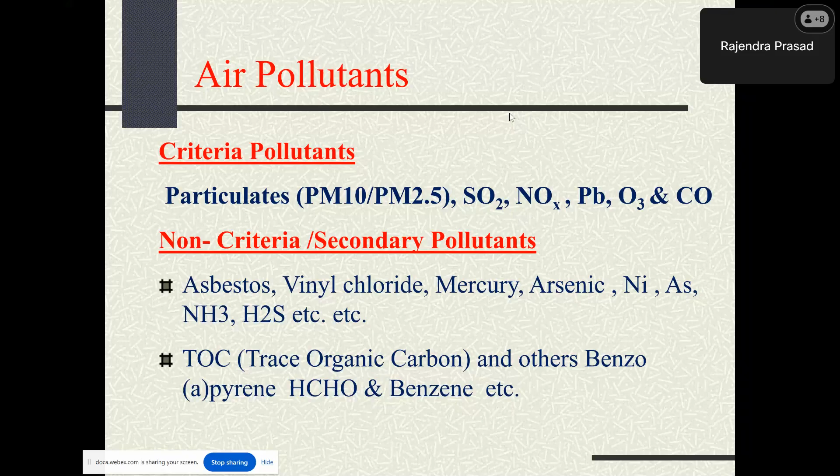So you have got an idea that there are particulate and gases, there are criteria pollutant and non-criteria pollutant or secondary pollutant.

Now the objective today of the presentation is to really give you an exposure on how to do air pollution management and control. Of course, I will come on this at the last part. First, I want to show you the challenges for slightly more exposure and understanding of where we are at this stage. That part we will cover in the last part of the presentation.

Then this air pollution management or control is the reduction of this pollutant. You have to understand that pollutant emission should be reduced to a point such that there is no noticeable adverse effect associated with the pollutant.

To determine the extent of reduction, understand and establish the linkage between source and receptor using meteorology. At some point it is emitted, and receptors are spread all around the atmosphere. Meteorology includes wind speed, wind direction, temperature, humidity, mixing height, stability, wet barometric pressure, and rainfall. All these parameters are part of the meteorology. They affect the emitted pollutant and impact the receptor.

So we have to understand these linkages between receptor and emitter, and establish a safe air quality level for the receptor - what is called the standard. If we say that the standard is 50 microgram per meter cube of say PM 2.5, then we say that at that level it is not going to impact our various receptors, including sensitive targets, significantly. So we can tolerate up to 50 microgram per meter cube, and this standard is not arbitrarily chosen.

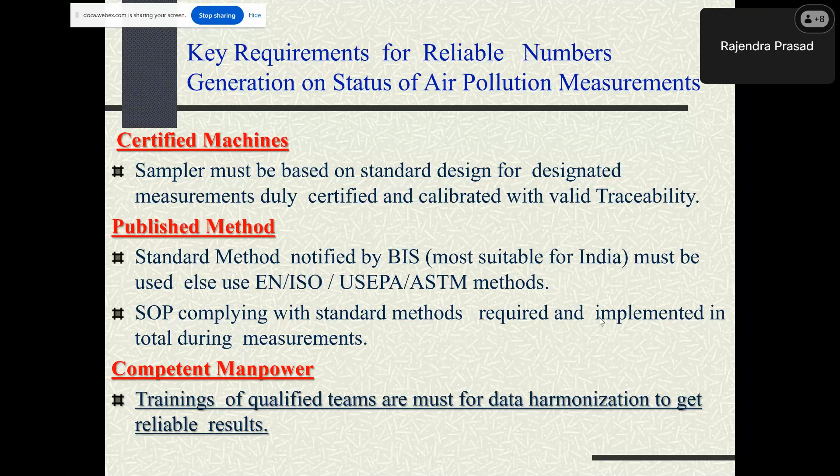Competency should be that for what we are hiring, or for what we are putting that person on the job, he should be able to give a number which should be reliable, and it should have all that flavor for which that person is involved, and he should have that qualification, learning, and he should do that experiment with that. So I made clear that these three things are very important.

Now you see what is happening in our country. Government of India has invested enormous financial resources and scientific manpower to create a formidable infrastructure in India for air quality monitoring, to know the quality of air regularly.

All these things which I'm mentioning here are based on my own exposure and understanding. So they are not taken from anywhere else - I'm giving you my own experiences. At some point you may feel that I may not be 100% right, but these are my experiences. So please take them in that spirit and see what possibility we can do to improve upon.

We know that monitoring is key and the first step towards management and control of air. Therefore, it is the responsibility of the lab monitoring groups to work honestly, ethically, and passionately in mission mode to generate reliable numbers for credibility.

I want to once again read this - that the people who are working in the laboratory or in the groups, they should work honestly, ethically, and passionately in mission mode, because our objective is to really do the measurement as correct as possible. That number is what we use to plan so many things - we'll say whether it is polluted or not, if polluted how much, if action needs to be taken, what action, which action is appropriate. All these things are built on that.

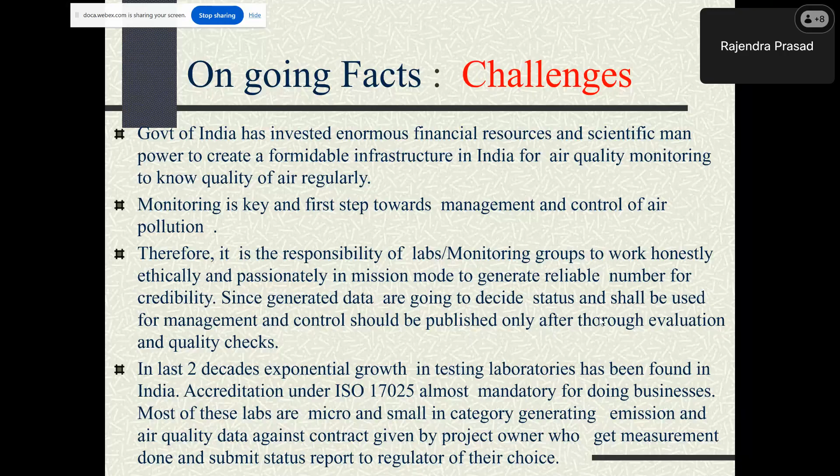You have to make the payment for their services. If you will not make the payment to that service provider, will you be able to get the report or results manipulated or impacted, and then the true things will not come? So this is one major challenge which is observed and which is taking place in the country.

Now you see the growing inter-laboratory business competition. There are now a large number of labs set up. Among the private labs created, mesh...

Basically what has happened is that several, I think 7-8,000 testing labs are there, and out of this around 1,000 or more than 1,000 environmental monitoring labs are existing in the country. ISO 17025 protocols are compromised because there's a lot of interlaboratory business competition and they are bypassed. Manpower competence is not continually improving. This is a basic need, that every time the competency of the staff and the laboratory has to be increased, but it is not improving.

Whatever I saw, I did several hundred lab assessments, and this is my finding, that this aspect is getting compromised. The teams are not participating in competence-enhancing training programs or conferences, so their exposure is not really increasing, and they are not able to really achieve the objective of ISO 17025 the way it is desired and the way it is implemented.

SOPs are also compromised. A number of you are making SOPs from the method. Some of the things which you are not having, you are basically neglecting, you are dropping, and ultimately what will happen? It is going to impact the value. And if the value is impacted, then all your efforts are basically going to waste. Poor quality consumables are used in the face of the lower price of the monitoring being offered, because for the competition you have to keep on giving less price.

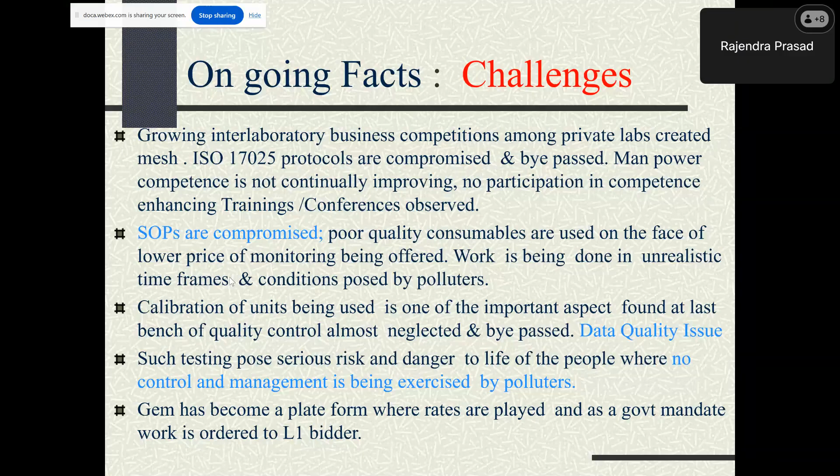The values of the critical parameters they are monitoring have significant errors and leakages. And the problem then is, whatever value they are reporting, there is no confidence in the value. Such testing poses serious risk and danger to the life of people, where no control and management is being exercised by the polluters. GEM has also become a platform where rates are played, and as a government mandate, work is ordered to the L1 bidder. Because of interlaboratory business competition, people keep giving lower prices, and once the order is received, to cope with that business, they compromise a number of aspects. Now let us go deeper into the experience I gathered in the past.

Accurate and reliable measurement of air pollutants is a challenge due to the wide range of pollutant concentrations. Besides the GEM business and other issues, now let us go to the subject. In our country there are areas where the concentrations are 20, 30 micrograms per meter cube of PM10, PM2.5, but there are areas where these concentrations are 500, 600, 800, 900 micrograms per meter cube. This means our system should be such that we can have the lowest value measurement and the higher concentration measurement.

And we do not have a system saying for the low range you can use this, for the high range you can use this. Our regulation is not really talking of anything on this. They say this instrument, this notification, this method, but what kind of accuracies and errors that method has, that is creating a serious challenge. Then there are harsh and variable climatic conditions, somewhere very low temperatures, somewhere very high temperatures. Recently I was talking to Ladakh, they are having -25, -30. The same regulation is also applicable there.

Whether these machines will work there, whether these methods which have been prepared are going to be applicable correctly, whether they will be able to measure these pollutants or not. These issues are there when the barometric pressure becomes 600 in the hilly area, in the Manali area, many areas where these measurements are being done. Those values are not going to be produced confidently if those provisions are not incorporated in this.

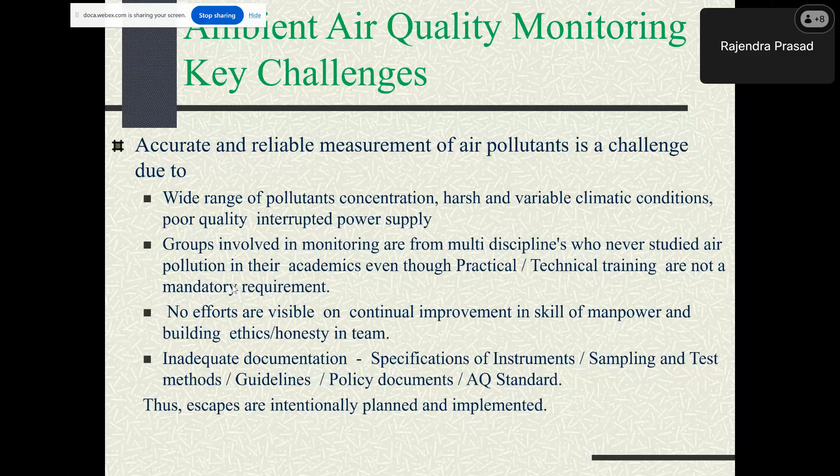Now let us come to some more aspects: quality control and quality assurance, or uncertainty assessment. These concepts or tools are not in regular practice and never made a part of the reporting. If you are reporting some result, don't you feel that you should also analyze a known sample and say that in my known sample analysis we got 2% or 5% variation, so we are ensuring that we have checked quality control and quality assurance? For quality control, you should have better gadgets, better manpower, a better system at your place. Uncertainty assessment is not done, and many times not understood either.

Whenever you are reporting a number, this is not an absolute number, you have to say what possibility of error is there, and the error may be because of instrumental error, analytical equipment error, climatology or environmental conditions error, or error of the person doing the work in taking readings. Uncertainty assessment is already well defined: the type A and type B components need to be taken, and then one can find it out. If you are reporting 100, there may be 10% or 5% uncertainty, whatever it is.

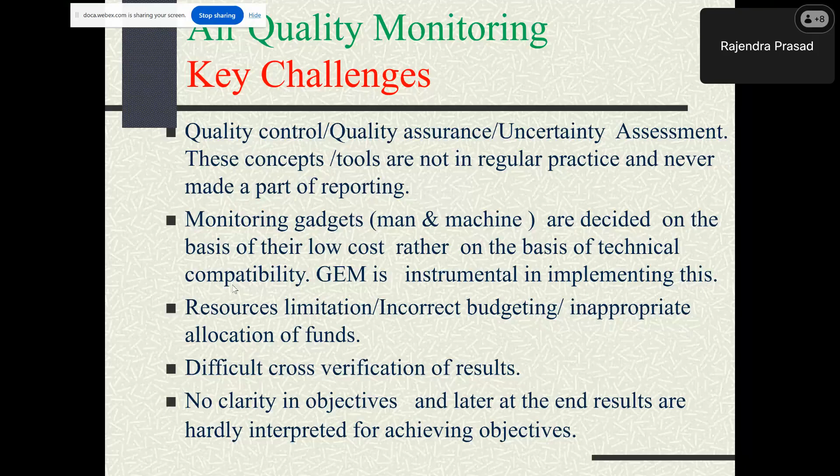Now if we concentrate on the infrastructure part: inadequate sampling and analysis instrumentation, erratic power supply, already said. Standby equipment is not considered. We are not planning. We feel that having two instruments is enough, but sometimes an instrument may go out of order or may not give the desired values. Then you can use a standby while you fix it. So this should also be part of the management.

Spare parts and consumables for maintenance and operation of the instruments are not procured. Intermediate checking systems are not considered. We assume that once calibration is done, the entire year it will remain stable, even when taking it from one place to another without maintaining the requirements suggested by the manufacturer. That is really over-expectation.

From time to time it should be checked whether all parameter values are coming correctly. And ISO 17025 very clearly asks that these instruments be checked more frequently, monthly, bi-monthly, quarterly, if you are using them in the field, to see whether the calibration or values given by the machines remain reliable. Annual calibration of all instruments used is not done as per requirement. Only one set of instruments is calibrated.

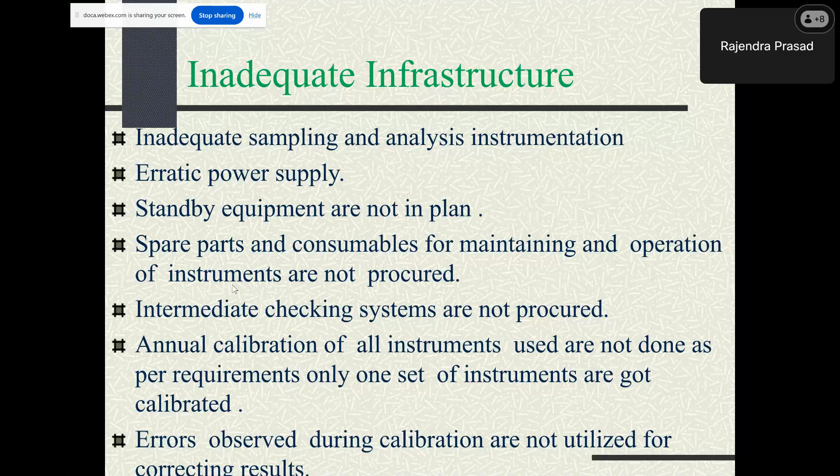A very interesting aspect is that errors observed during calibration are not utilized for correcting results. This part pains everyone, and me very badly. You get an instrument calibrated, you get 1.5% error, 1% error, 2% error. What are you doing with that error or deviation? You are not incorporating it. You keep those certificates only to show the auditors. Calibration is not done for the auditor, it is done for improving the results.

Now, towards the management level, what sort of things? Monitorings are not given adequate priority. Appropriate fund allocation for the instruments and the consumables is not done. Findings reviews are not done for any action on the results, because from a number of online monitoring stations and offline monitoring stations, results are coming. Management is hardly bothered.

They feel that we have complied, and all the time they want the record to be made like this, that everything is all right, pollution levels are well within the standard, so nothing needs to be done. And even if it is beyond that, they will not report that; if emissions are beyond that, they will keep on reporting everything is all right.

If everything is all right, then how are these problems in our country seen everywhere? The levels are more, and the health problems are there, many things are there. So management has to look into these things.

Provision of inadequate manpower, because if you have good capability and do good work, you will be shifted to production, you will be shifted to another area, sales. But for the environment, you are putting those people who are not very productive, and you say that we will put you into that field and you do work there.

So this is the attitude of organizations, management level, or the industry, where you basically find that the people who are managing these environmental monitorings are those teams which are less exposed and less professional in that area.

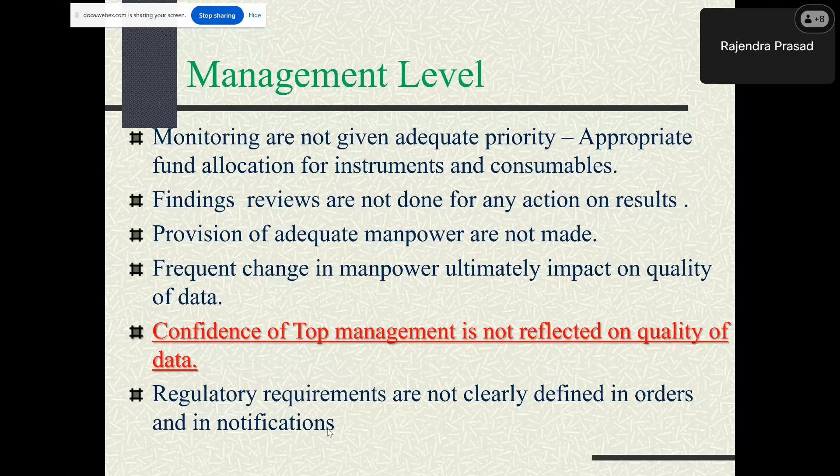Specifications of instruments are not even defined. NPL has been decided as the certification body very recently, only 3 or 4 years back, and air pollution is as old as the Act of 1981. So how much time we took to certify an organization or body that will do the evaluation and certify the instruments, but its infrastructure is yet to be established and start work, and manpower is not there.

Some instruments they have procured and the work is going on, something they have started, but still a lot more needs to be done. Instruments do not meet key requirements mentioned in the standard sampling method. Tolerances, accuracy, precision, permissible uncertainty parameter-wise are not defined, not implemented.

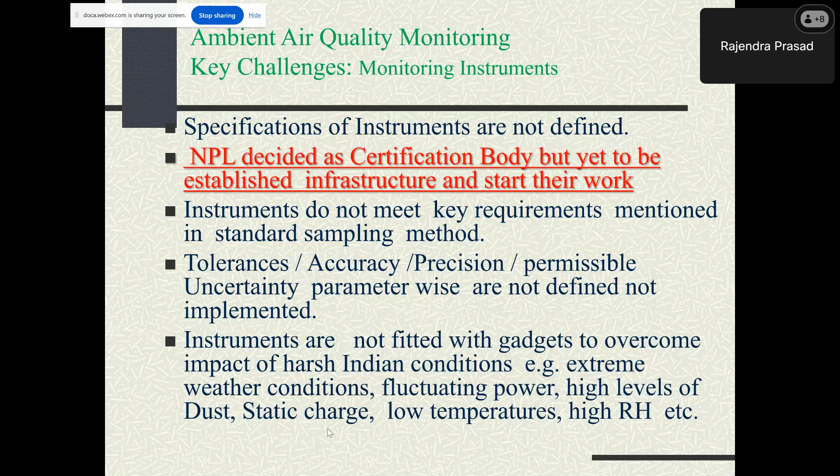Instruments are not fitted with gadgets to overcome the impact of harsh Indian conditions: extreme weather, fluctuating power, high levels of dust, static charge, low temperature, high humidity. These also require attention. If these things are not looked at from that detailed point of view, the people using these instruments may not be able to generate data confidently.

Calibration and intermediate checking of the instruments are not available for the full range with known uncertainty. Masters used for calibration must have valid traceability. If available, these are not used to check samplers and analyzers on a regular basis. For dust sampling, a proper omnidirectional, wind-insensitive inlet is needed with certified fractionating impactors. Devices are found compromised because of cost cutting.

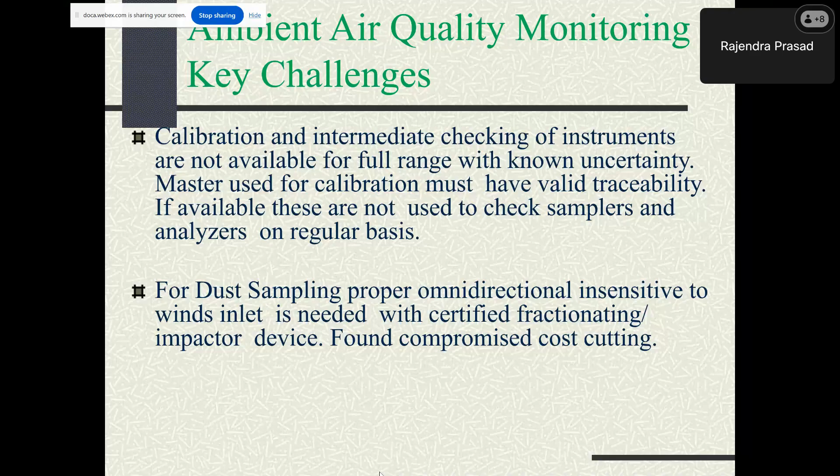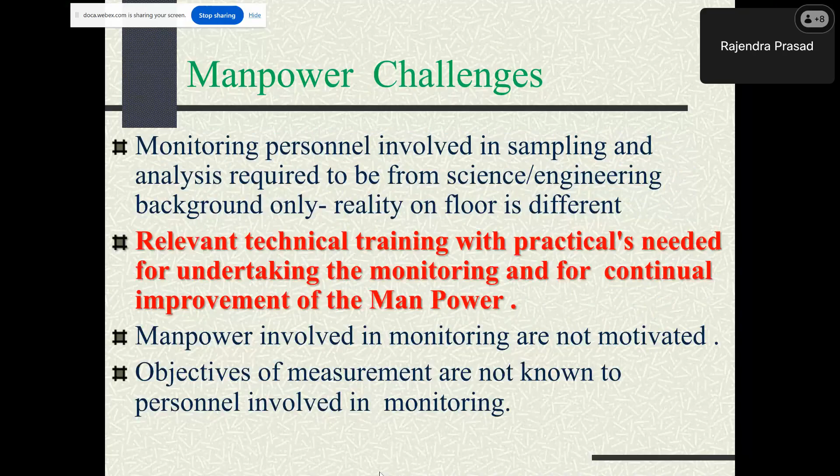Manpower challenge I've already highlighted, and there's no point highlighting them once again. This is very important. We should be able to see that the people have regular training and competence building. Now, practices, what is required. The laboratory where analysis of collected samples is done should have accreditation. It is a mandatory requirement. So one should have it, and accreditation should be in true spirit.

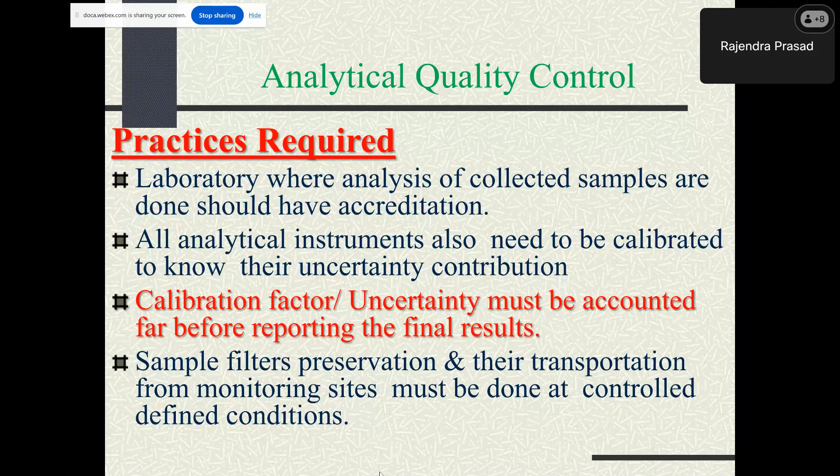All analytical instruments also need to be calibrated to know their uncertainty contribution. Calibration factor and uncertainty must be accounted for before reporting the final results. Sample filter preservation and their transportation from the monitoring site must be done at controlled, defined conditions. You should have a setup and you should be able to implement that.

Filters should be used for sampling only after their weight stabilization and conditioning. In these filters, because a lot of air gaps are there, the moist air goes there, then the water molecules remain there, and ultimately the initial weight should be taken only after conditioning. A balance of relevant accuracy is required for specific use. Filter desiccation and weighing must be done in a temperature and RH controlled room.

Sensitivity and resolution of the analytical system must be carefully evaluated. Field blanks are used to know the handling error. You see that the filter handling and conditioning system has significant bearing on the monitored dust concentration. In our country, dust is a major pollutant, and other gases and other pollutants are also there. They are also important, but dust is taking the foremost seat.

And you see that we are still using the high volume respirable dust sampler for PM10 measurement. There we are using an 8 by 10 inch filter sheet. And how to weigh this big size of filter paper? There is not even a balance available which can weigh this. And you see, we are folding it, putting it in a beaker, and then finding out its weight. A lot of challenges there.

Size of the desiccator and the saturation of the desiccant result in incomplete conditioning. That part requires attention. Desiccators are not equipped to display prevailing temperature and RH in the chamber where filters are kept.

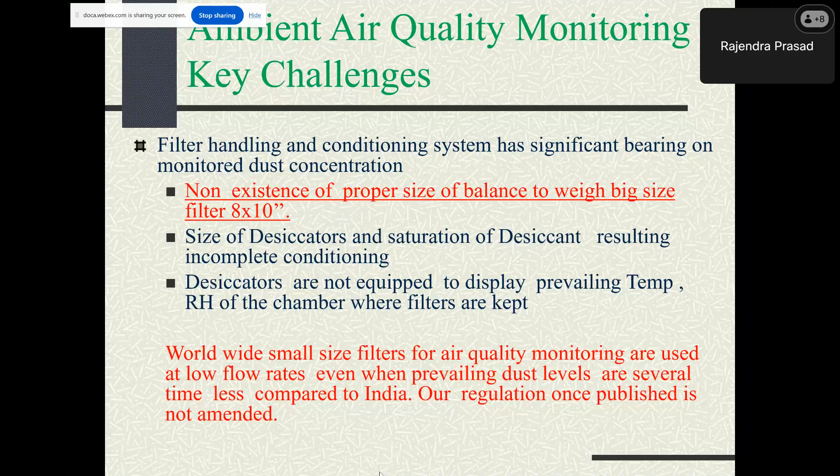Inadequate documentation in the method and the standard. They are saying 24 hours. I say, which 24 hours? I do not know. Midnight to midnight, morning 6 to 6, 10 to 10. People are reporting values of different 24 hours, so they are not comparable.

Ultimately, in Ahmedabad someone is measuring some value, in Delhi someone else is. We do not know which 24 hours he has operated the machine and which 24 hours the Delhi people have operated. So we need this kind of clarity. I'm putting my effort into these kinds of things with the help of BIS, but still every area needs to be given attention, and ultimately find out what the possibilities are.

Consecutive and non-consecutive days are mentioned in the standard. Thereby it is clear, but it is not clearly defined. What happens? You say non-consecutive days, 2 consecutive days, 104 samples. If you see that, then you will not be able to really check the data which you have generated for a year long. The gap is there.

Sampling flow rate for the various air pollutants is not clearly defined. For example, PM10 is done at 1 cubic meter per minute in RDS, and also at 1 cubic meter per hour in the PM2.5 sampler for PM10. Results obtained at these flow rates have significant differences in uncertainty. Thus, PM10 data being generated at two flows may not remain comparable.

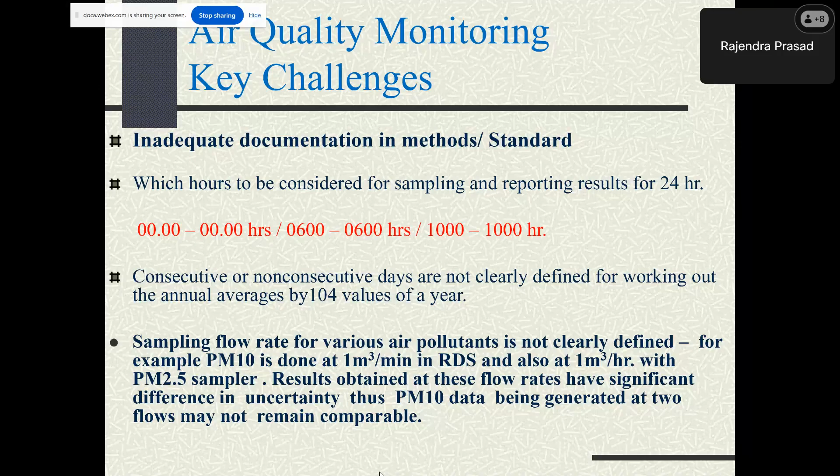But someone is doing it with 1 cubic meter per hour, someone is doing it with 1 cubic meter per minute. So these are the incomplete documentation; procedure, calibration frequency, and accuracy requirement of the master are not specified in the method. According to the ambient air quality standard, 12 pollutants need to be monitored to define quality of air.

Some measure all parameters for 104 days as asked in the standard in a year. Some measure only a few parameters, the criteria pollutants, whether they have these 104 days, and remaining whenever they have time and resources.

The new standard came in November 2009. Still, clarity is not documented on which parameter to be monitored, when and where. If you are telling a 24-hour sample, whether exactly 24 hours is run, then only will you consider it a valid sample, or 10 minutes less or 10 minutes more. So validity of the sample says 75% of the time it has run, then we will say okay, it is a valid sample.

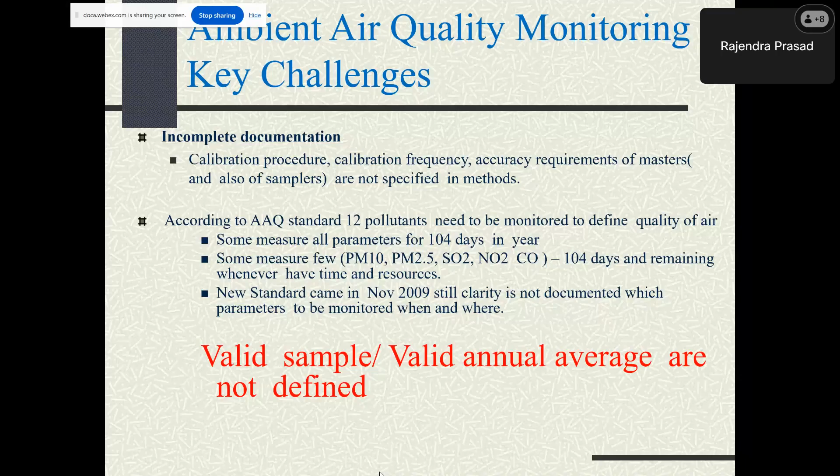Now I'm going to make a case presentation, just to show you that these kinds of things are required. I have a lot of hope things can improve. I've highlighted only those gaps which were there. Of course there are a lot more strengths available, but let me show you two or three more slides about what documentation is basically required.

Multiple instruments with filters are needed to collect 24-hour samples to know day-to-day variation in dust level. If you want to monitor PM10 and PM2.5 at one location, you need two samplers. And if you want to do benzene and CO, you should have two more samplers. The gases you can attach with the respirable dust sampler. So multiple instruments need to be operated.

In winters, on foggy days, one PTFE filter for PM2.5 sampling chokes within 6 to 8 hours because the levels are very high. Since it's difficult to predict choking time, it's a kind of challenge to do 24-hour measurement. PM10 sampling using RDS is more difficult and unreliable even when multiple filters for a 24-hour sample are used - three filters one can use 8-hourly.

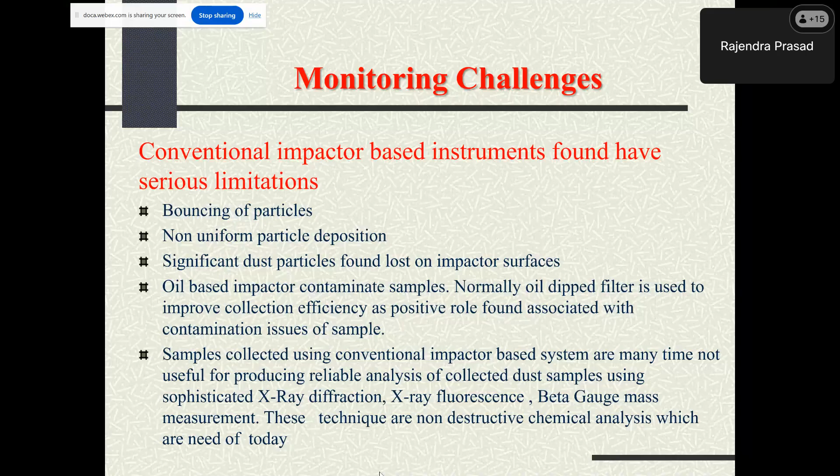The same method is being used where concentrations are many times more than 200, more than 300, 400. I feel these values which are being reported using the same technology are very difficult to say whether they are correct or not. Then the other one, the virtual impactor, is used for higher concentrations. It is well documented in the USEPA methods.

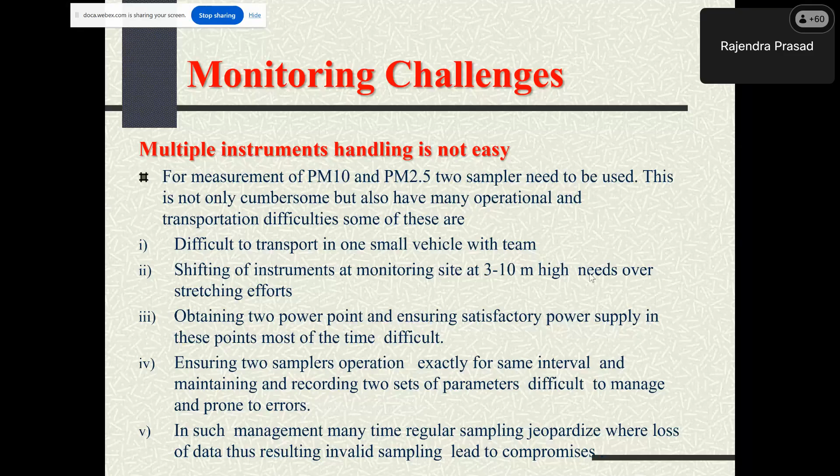For measurement of PM10 and PM2.5, samplers need to be used. This is not only cumbersome but also has many operational and transportation difficulties. Some of these are difficult to transport. Shifting of instrument and monitoring site at 3 to 10 meter high needs overstretching effort. Obtaining two power points and ensuring satisfactory power supply at these points is most of the time difficult. Ensuring two samplers operate exactly for the same time interval, and maintaining and recording two sets of parameters, is difficult to manage and known to have a lot of error. Many times the sample becomes invalid. In such management, many times regular sampling gets jeopardized, where loss of data resulting from invalid sampling leads to compromises.

This is the recent sampler which we have evaluated and developed. We have developed this since my completion of PhD. We have done a large number of instruments which are used across the entire country. They are all indigenous equipment, with the earlier company, and then with our separated company.

In the brand of Ecotech, you see that the brown filter is showing PM10, and this is showing less than 2.5, so this is showing 2.5 to 10 micron. By color also one can see that both filters are connected here, and air is entering. So one instrument is good for doing both PM10 and PM2.5 measurement. Gujarat Pollution Control Board at Gandhinagar has procured some 15, 16 units from us. They are operating and monitoring very easily. So this is the latest development.

It basically complies with the USEPA method, but of course CPCB has not yet notified this. They are still remaining with that WINS impactor, where the upper concentration limits are there. You cannot monitor more than 200 microgram per meter cube.

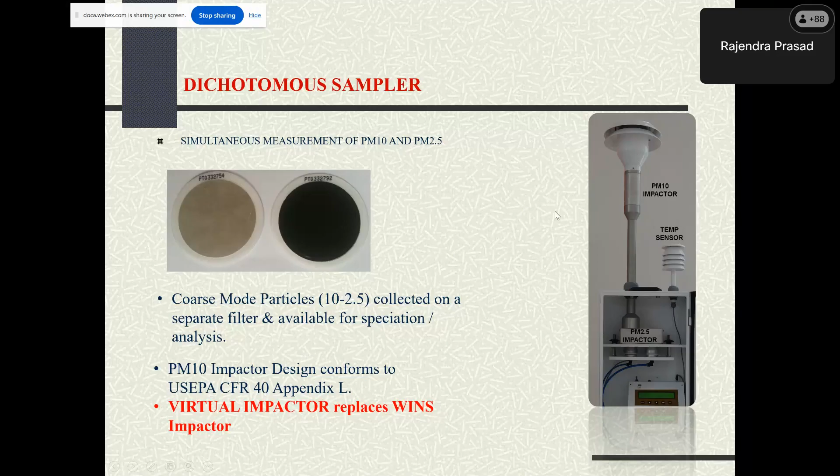Now I want to read this PPT which shows what kind of details are required when documenting the method. This is only for exposure, not to read everything in detail, but only to give you a feel. Let me read the principle.

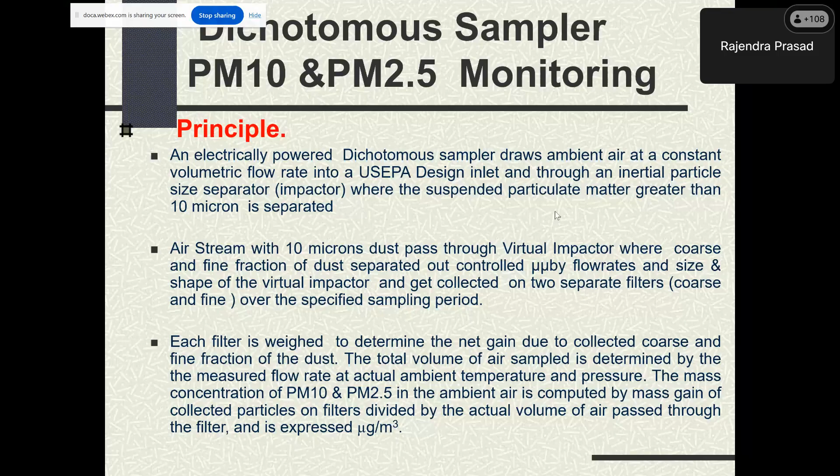An electrically powered dichotomous sampler draws ambient air at a constant volumetric flow rate into a USEPA design inlet and through an inertial particle size impactor, where more than 10 micron dust is separated out. Now the air stream with less than 10 micron dust passes through a virtual impactor, where coarse and fine fractions of the dust are separated out, controlled by flow rate and size and shape of the virtual impactor, and get collected on two separate filters, coarse and fine, over the specified sampling period. Each filter is weighed to determine net gain due to collected coarse and fine fraction of the dust. Total volume of air sampled is determined by the measured flow rate at actual ambient temperature and pressure. The mass concentration of PM10 and PM2.5 in the ambient air is computed by the mass gain on the filter divided by the actual volume of air passed.

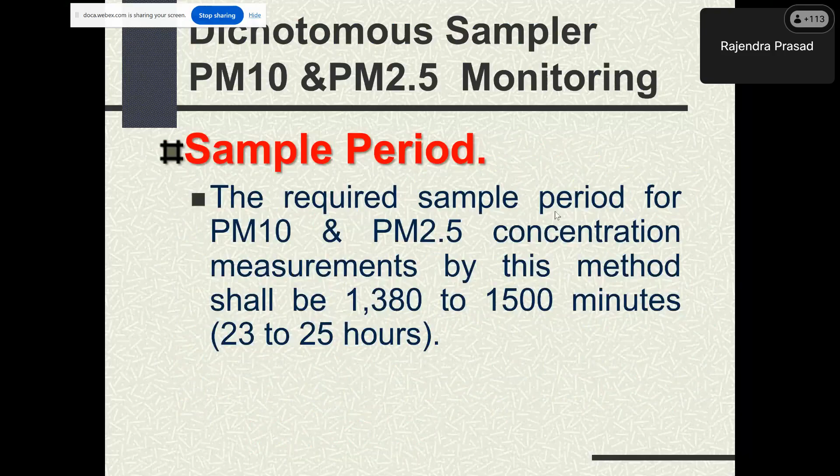Required sample, it can be operated for 24 hours without any issue. It has a very heavy duty pump, but it is not very heavy because the flow is low, that is the medium flow of 1 meter cube per hour. This is a recent development in the last 3 years or so.

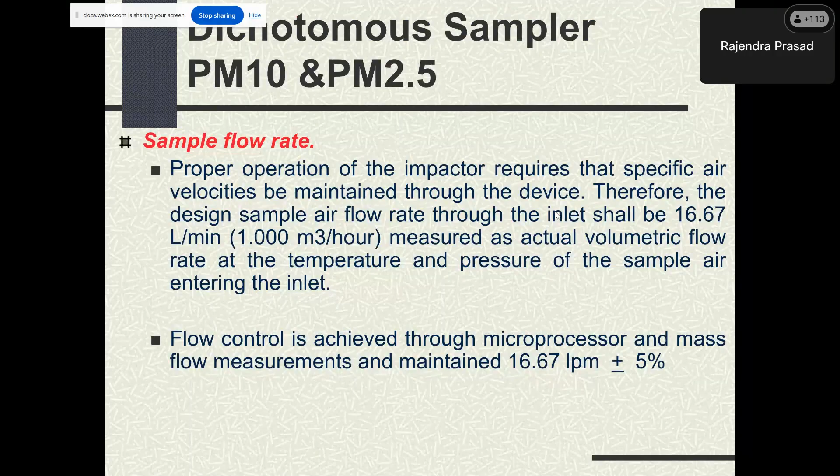Sampling flow rate is maintained at 16.67 liter per minute. Flow control is achieved through the microprocessor and mass flow measurement, maintained at 16.67 lpm plus minus 5%. Flow rate cutoff: the sample air flow rate control shall terminate sample collection and stop all sample flow for the remainder of the sampling period. If the sample flow rate deviates by more than 10%, it is automatically switched off. This is mentioned in their documents, and the sampler is designed to meet these requirements, and someone has to certify whether these requirements are completely fulfilled.

At this stage, whatever the manufacturer is doing, he is doing for his own satisfaction and then starts selling, because certification bodies are not there. But now if these things are coming, I think it will become a lot of improvement in the process, and the quality of the data will come using these kind of certified samplers.

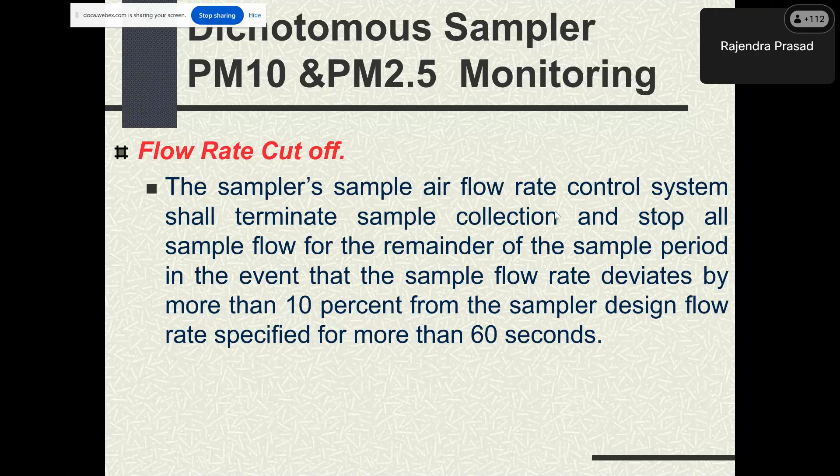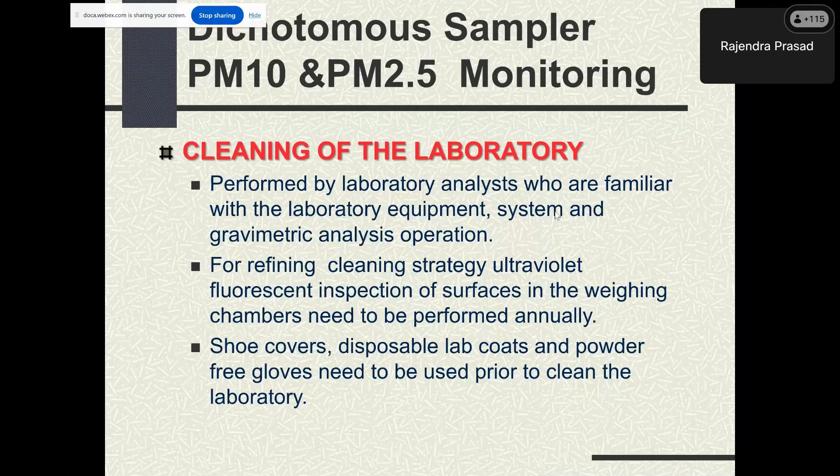Cleaning of the lab is performed by laboratory analysts who are familiar with the laboratory equipment system and gravimetric analysis operation. For refining cleaning strategy, ultraviolet fluorescent inspection of the surfaces in the weighing chamber needs to be performed annually. These are written into their documentation. Shoe covers, disposable lab coats, and powder-free gloves need to be used prior to cleaning the laboratory.

They have mentioned what kind of personal requirements are needed. Laboratory personnel will always wear clean clothes and wash thoroughly all parts of their body that may be exposed during the weighing, because you are doing PM 2.5, very fine dust, and particles on your body and clothes can contribute during the weighing.

Laboratory coats and gloves are required to minimize the potential for laboratory contamination, so these should not be moved out of the weighing room. That kind of precaution is required.

Must be aware of the potential for unacceptable relative humidity excursion during seasonal extremes such as high heat and humidity in summer. So humidity control, temperature and humidity controlled chambers are required, or small rooms are required.

Personnel employed to perform weighing operation must have at least a high school diploma with at least 6 months experience in laboratory sample handling and record keeping practices. These are very clearly mentioned in their standard method.

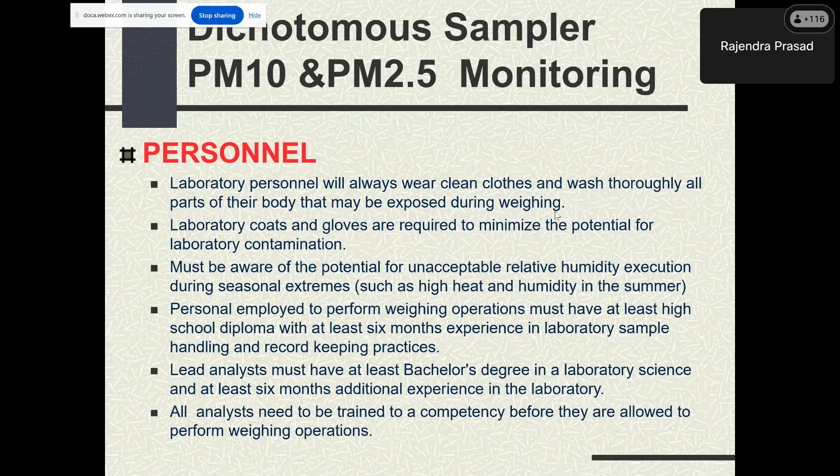The lead analyst, who manages the laboratory, should have at least a bachelor's degree in laboratory science and at least 6 months additional experience in the laboratory. All analysts need to be trained to competency before they are allowed to perform weighing operations.

Sampler location: a dichotomous sampler must have unobstructed airflow for a minimum of 3 meters from all directions. If samples are collected with multiple particulate matter samplers, the spacing between sampler inlets must be at least 1 meter from co-located samplers.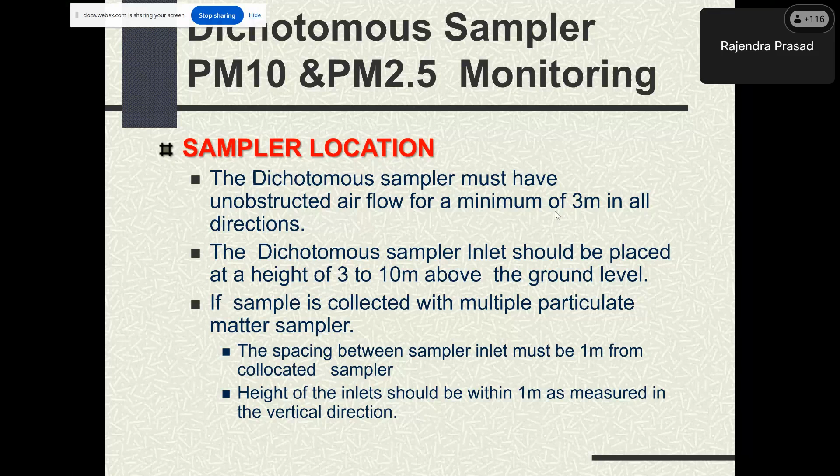Height of the inlet should be within 1 meter as measured in the vertical direction. If you keep it on the rooftop, your inlet should be at least 1 meter away from the rooftop, so that winds don't increase dust levels near the sampler and impact the concentration of dust being measured.

Now the analytical microbalance, which is required for weighing, must be adequate to weigh the filter between 100 to 400 milligrams, and must have sufficient room to weigh the type and size of the filter. The microbalance must have a minimum readability of 1 microgram for PM 2.5.

Of course, in our country, the pollution levels are very high, so even a 10 microgram accuracy balance can be utilized. But these things should definitely be outlined in the method. In BIS, when we wrote this method, we incorporated some of these things based on our own experience and based on documentation of other methods.

Repeatability should be 1 microgram. The balance must be calibrated at installation and checked immediately before each weighing.

Electrostatic charge buildup may need to be neutralized in the microbalance weighing chamber. What happens? We are using these PTFE, these Teflon filters. While sampling, static charge is developed. That charge needs to be removed. Otherwise, you are getting an incorrect weight because the charge value increases. So you are bound to report the wrong value then.

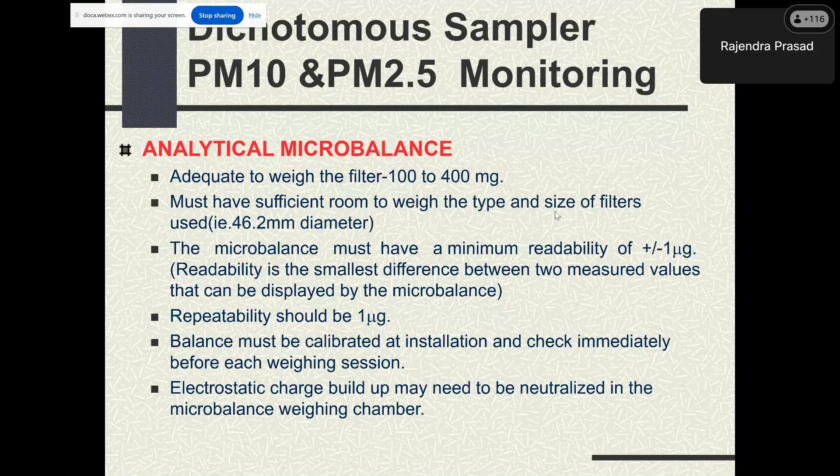Correct filter should also be used. You see that in our monitoring, what happens to compromise the cost? We are using non-standard filter paper only to save the cost. Their pore size, their collection efficiencies are less. Then ultimately, some part of the dust passes through the filter paper, and ultimately we end up with the lower concentration.

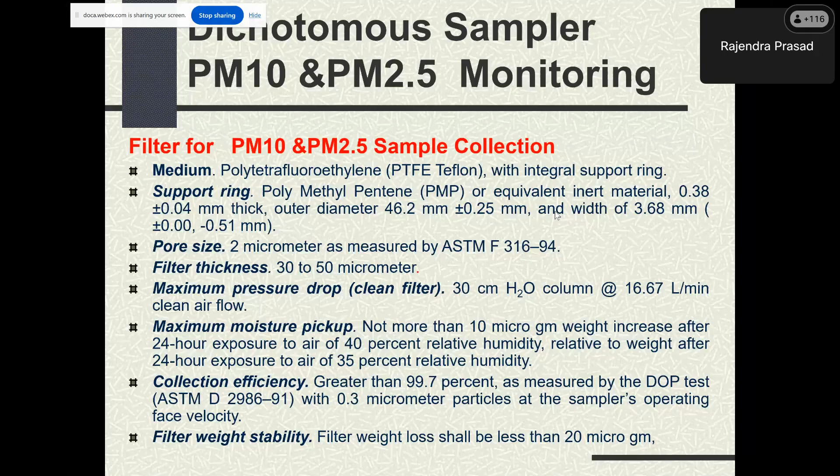This filter is called polytetrafluoroethylene filter. It has an integral support ring. Their size, pore size, thickness 30 to 50 micrometer. Pressure drop 30 centimeter water column at 16.7 liter per minute. Maximum moisture pickup, collection efficiency, and filter weight stability. 20 microgram is required. Many times you are weighing, it should not vary more than 20 microgram from one measurement to another measurement. Test for the loose surface particle contaminant.

They have very clearly said that you have to do testing of the filter. After initial weighing, install each test filter in turn in a filter cassette. Drop the cassette from a height of 25 centimeter to a flat hard surface, such as a particle-free wood bench. Repeat 2 times for a total of 3 drop tests for each test filter. Remove the test filter from the cassette and reweigh that filter.

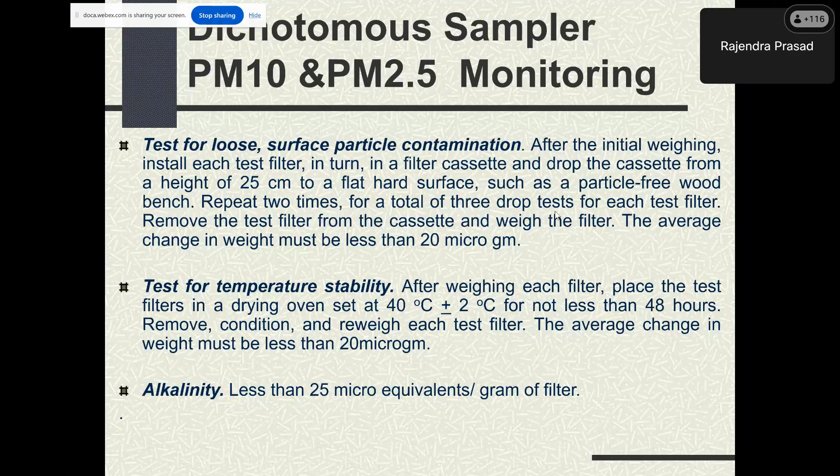The average change in the weight must be less than 20 microgram always, so that any loose particles added on the filter surface, which you are not able to see by naked eye, can be removed, and it can be passed that yes, we are handling our filter rightly. Test for the temperature stability, alkalinity, these are all defined in the method. What I want to show is that in our method, whatever we are preparing, we want that this kind of clarity should be developed or incorporated.

Weighing laboratory should have air conditioning, and including weekends, temperature and humidity should be maintained all the time. Locate the microbalance away from potential sources of drift, such as doors, windows, aisles with frequent traffic, ventilation ducts, and equipment with fans or moving parts. Locate the microbalance out of direct sunlight and away from local heating or cooling sources, such as open flames, hot plates, water baths, or the AC air.

Locate the microbalance on a sturdy vibration-free base, ideally a stone bench table, which should not touch the wall. Ensure the microbalance's base is of adequate height, so that working should not have problems. So these are some details I've shared with you, but there are some more things I want to share that will give you more interest. This has given more insight into the gaps and shown you some areas where more information is needed, so that reliable data generation can be visible in our country.

These are the kinds of instruments which are used for air pollution monitoring. You see all the instruments, I have only given you a photo here. In the back you can see the automatic weather station, which gives the temperature, humidity. It is solar powered, it has the wind speed and wind direction, and then barometric pressure, rainfall equipment, everything can be connected. Hourly values or 30-minute, 15-minute values can be done.

This is called the respirable dust sampler. Then this is the PM 2.5 sampler, these two. Then this is the combo sampler. Of course, dichotomous is not here. This is a recent development. The black one is the emission monitoring equipment. These are the work zone monitoring setup, noise monitoring system. This is the carbon monoxide monitoring system. These are the gaseous pollutant measuring equipment.

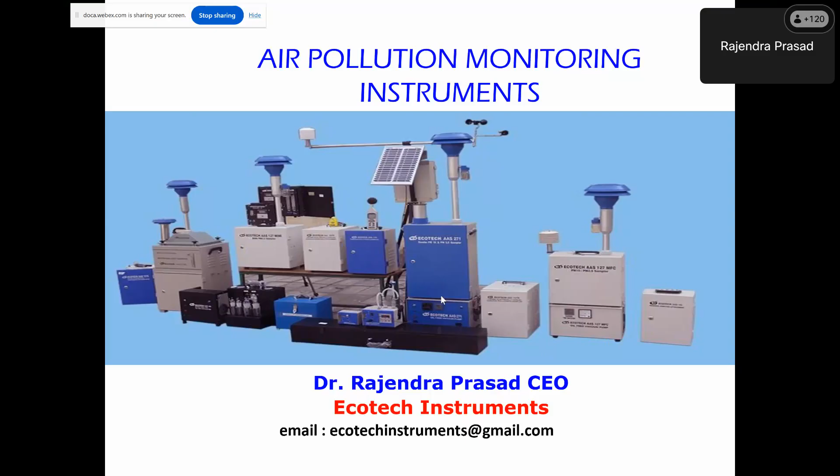So these are the range of equipment used for manual monitoring. They are considered the primary standard. They are not online monitors. Here it is the online monitoring system.

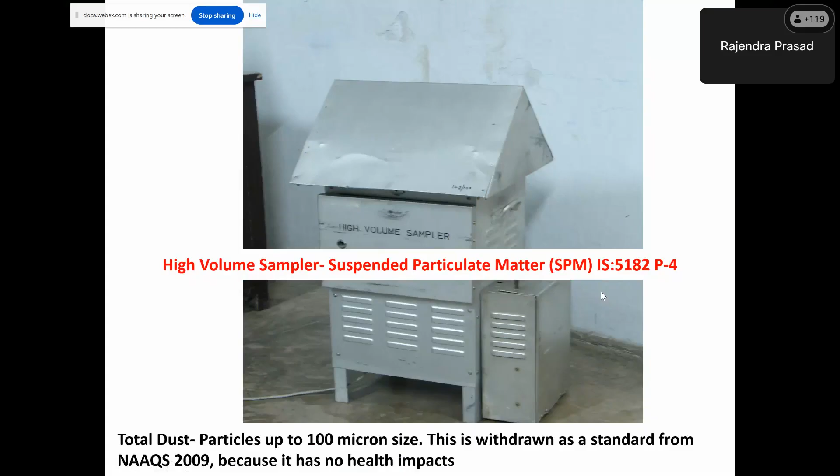So let us peep into this. This is the high volume sampler used way back in 1982 onwards. Now there is no standard for it, but for certain fugitive emission monitoring, one can use this.

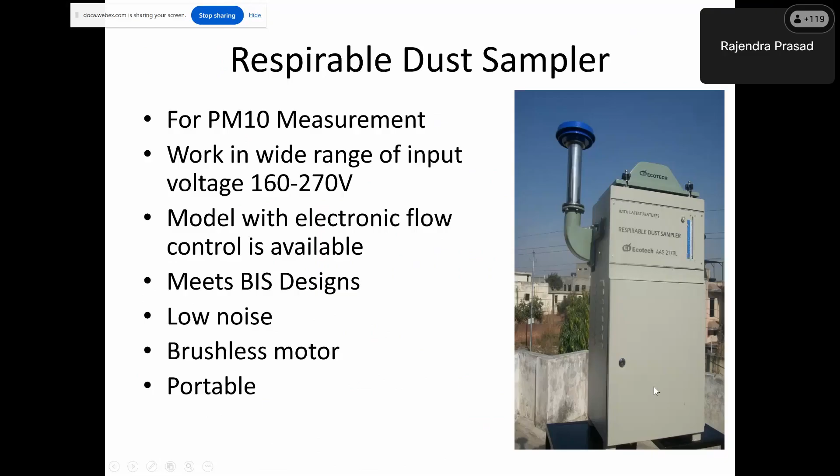There is a time totalizer which gives you the on time of the machine, and ultimately the air comes here, goes to the cyclone, goes to the filter paper. Ultimately dust retained here is less than 10. More than 10 dust comes here, and ultimately the direct reading flow is coming. A gases attachment can also be attached to this. Then the PM10 and the four gases can be monitored: SO2, NO2, ozone, and ammonia.

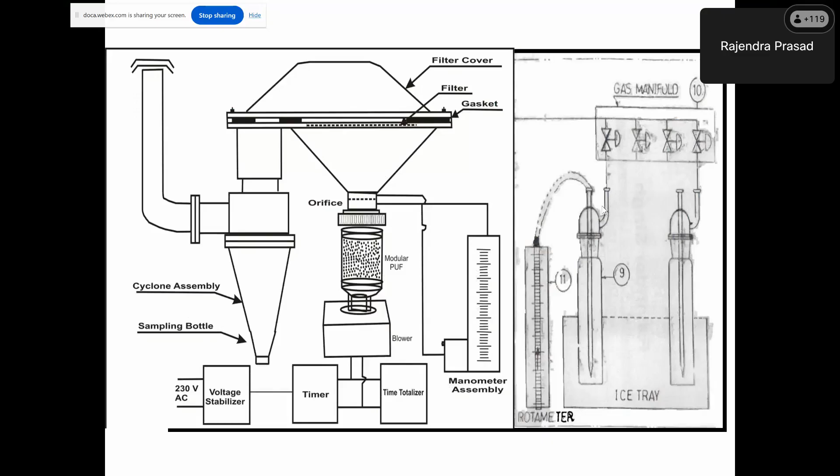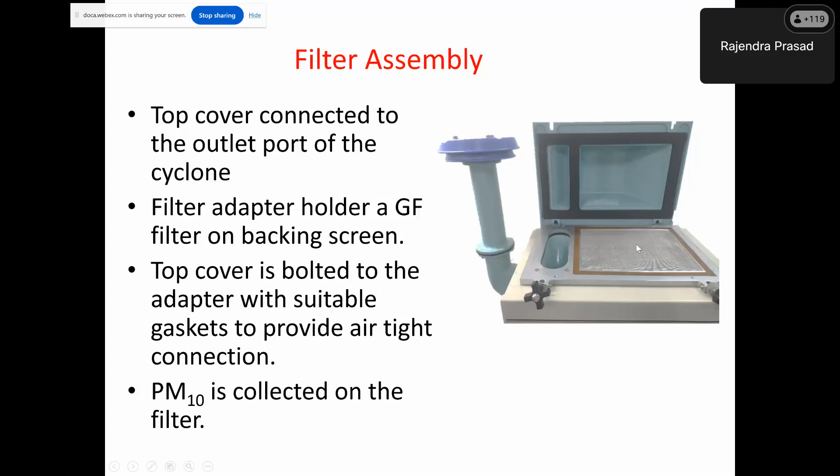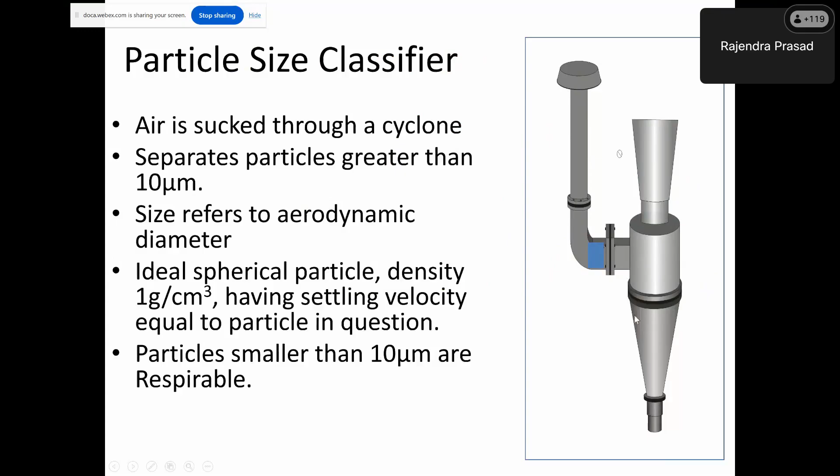This is the opening of that filter holder. Here you are keeping 8 by 10 inch filter paper, and this is the outlet of the cyclone, because suction is here, so all the dust and air passes through this, and ultimately the sample gets collected. And this is the cyclone. This is a very clean surface or glazed surface cyclone inside. The air goes inside, it moves this way, and the coarse dust is accumulated, fine goes up. Ultimately this is used, and this is the view of the sampler.

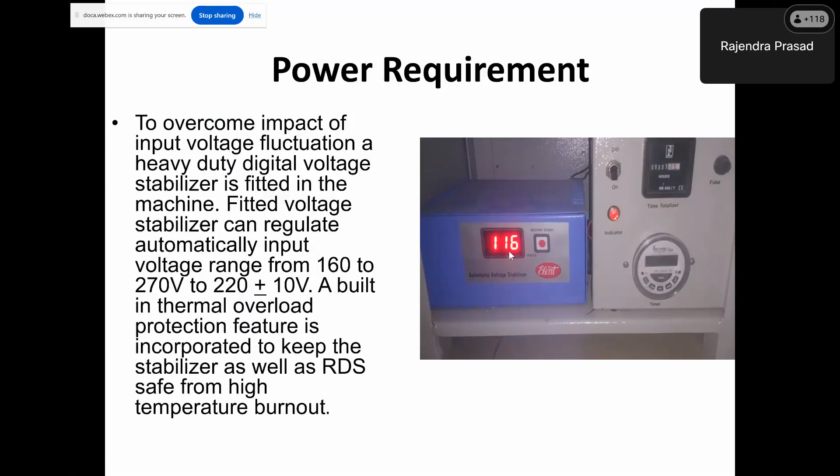Just to give you a peep. There is a stabilizer put in the machine, so that the input 160 to 270 is reduced to 220, so that we can ensure that the blower is getting stable voltage, and ultimately maintains that RPM, and the flow also remains maintained.

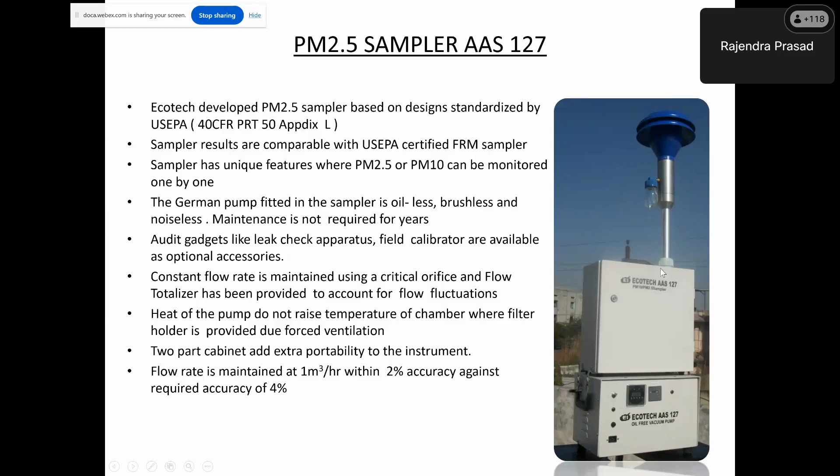And this is basically the PM 2.5 sampler. Here you see that this is the unit where the more than 10 micron dust is removed and less than 10 micron dust goes down. And I'll show you that.

Okay, this is the latest model. This is mass flow controller based. It basically has cloud connectivity also, where the modem is fitted inside. Whatever data logging is taking place for the flow, temperature, barometric pressure, filter pressure, is all logged into the microprocessor based data logger. It has got a modem, so the data also goes to the cloud. So the cloud data cannot be manipulated.

What was happening is that people were collecting the data, transferring data into the Excel sheet, and then used to manipulate it. So we reported to the CPCB, and they understood, and ultimately they have improved the method, and now data logging for the last 10 samples remains in the cloud, where there is no possibility of manipulation by the sampling lab or the testing lab or the groups involved in the monitoring. So that kind of catch has come.

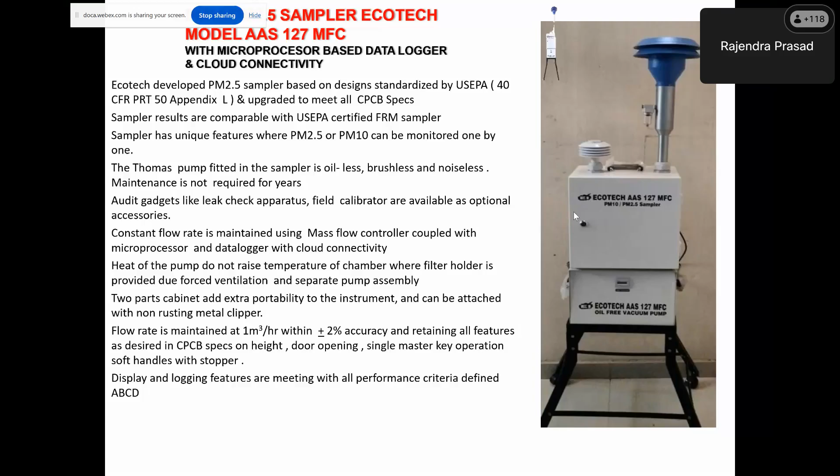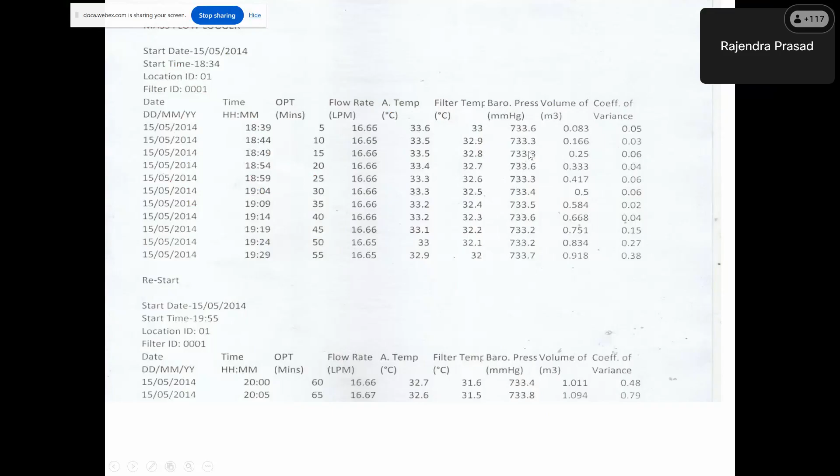This is the data recorded: date, time, then the operation time, flow rate, and then the ambient temperature, filter temperature, barometric pressure, volume, then the coefficient of variation. These records are available, and this is the sectional view.

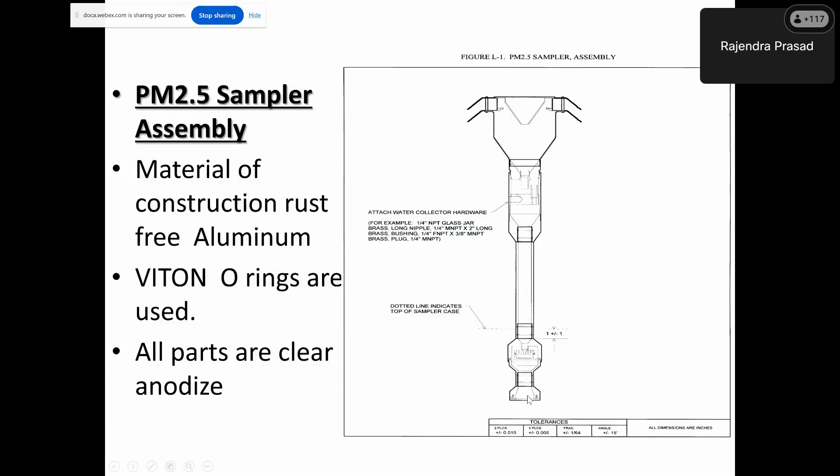Air is entering here; insects are not going to enter, so the jali is provided, and ultimately the coarse dust, PM10 and above, remains here, PM10 and less comes here, and then the 2.5 to 10 remains in the WINS impactor, and at the bottom goes the less than 2.5 micron dust. The WINS impactor is the heart of it, and this is good up to 200 microgram per meter cube.

This hole is most important, which is the cutoff, and the distance from this to this is most important and critical. If these two things are maintained, then the performance of this impactor for the cutoff of PM 2.5 is available. These are designs made by the US EPA, published to be made by CNC.

So they want that globally there should be data harmonization. Everyone should use the same technology, same flow rate, so that the data of India can be compared with Australia, India can be compared with America, all the country data can be compared, so that there is data harmonization.

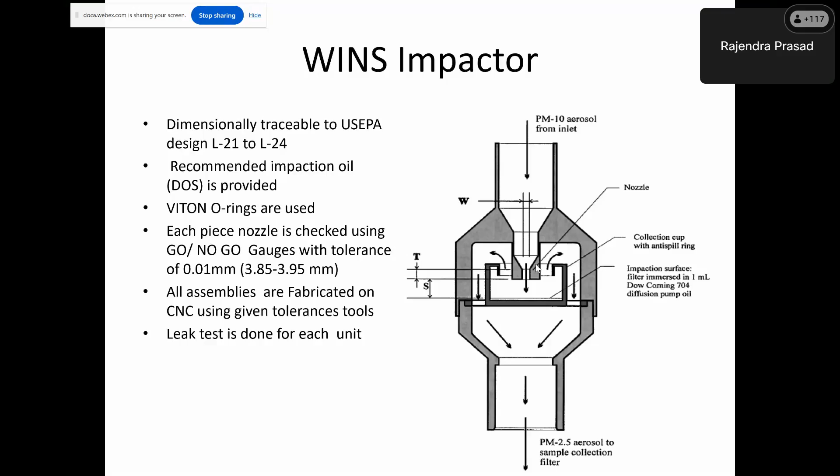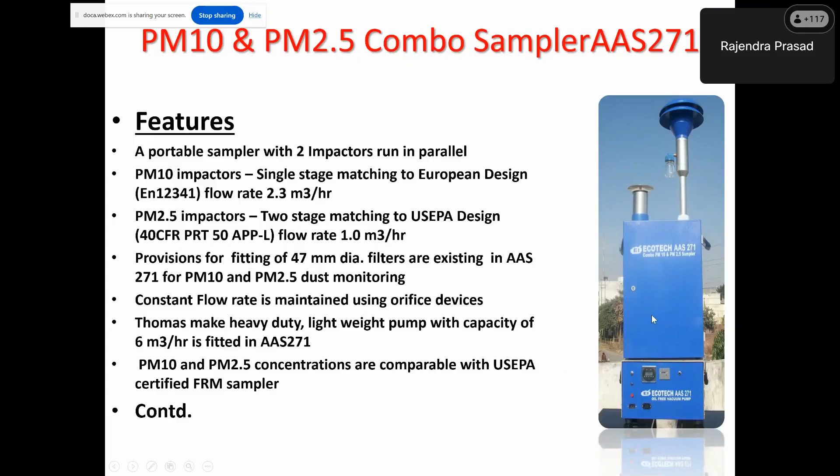We developed a combo sampler where both things can be collected, but there are two entry points here, 38 lpm, here 16.7. So this is also good and used for PM10 and PM 2.5 measurement simultaneously. So these are all the features which are there.

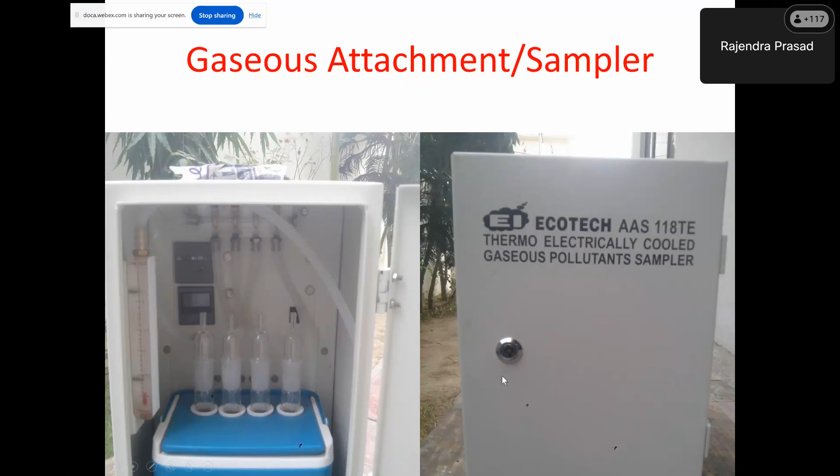The unfiltered air goes here, and ultimately after bubbling, the gaseous pollutants remain here, and then it goes to the pump, and ultimately pollutant-free gas goes out, and the built-in concentration is analyzed for the sulfur dioxide, nitrogen oxides. And this is an ozone impinger, this amber color. And here basically the trap is provided where the sulfur dioxide trapping is done.

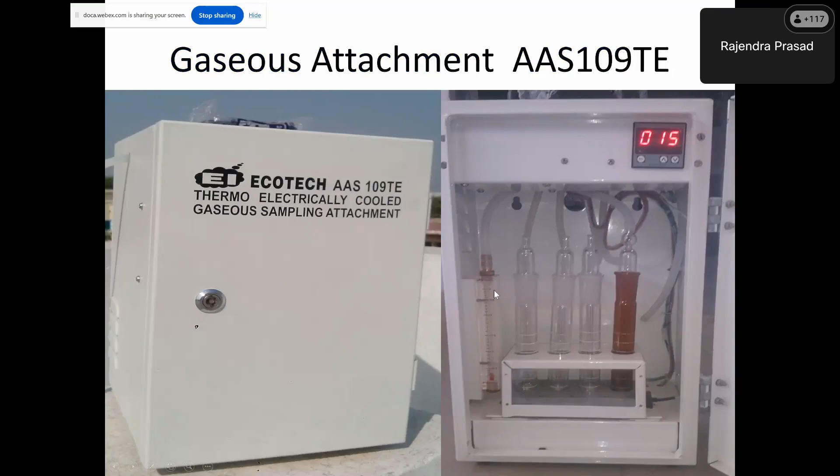And whenever ozone total oxidant we are doing, we have to see that we also monitor NO2. The NO2 needs to be subtracted from the values obtained, and one can report this. Temperature is maintained 15 degree. You see that this plate temperature thermoelectrically is maintained at 15 degrees centigrade. Flow rate one can set in this. So this way the gaseous pollutant sampling is done.

These are the bubblers; at the outlet this silica gel trap is fitted. What happens is that some particles also escape from the impinger, then they deposit on these needles, and ultimately flow reduces. If we are using this trap, flow reduction is not taking place. One can even use the filters also in this.

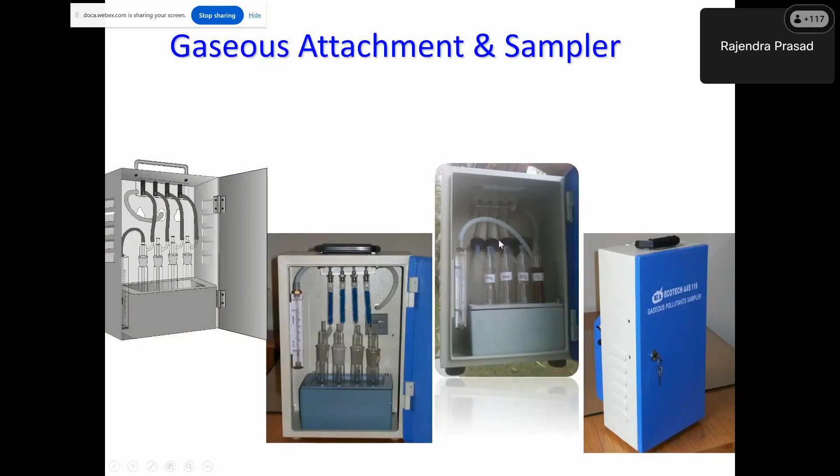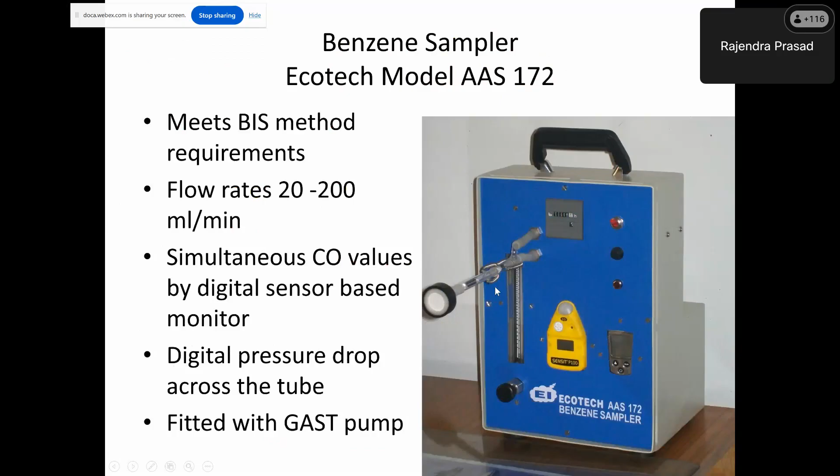Then there are basically the benzene sampling tubes. They are activated charcoal tubes, up to 200 ml. They can operate for 50 ml per minute, 200 ml per minute. But 1 hour or 2 hour sample can be collected. The backup portion is there. Pressure drop can be measured. Time we can find out, and ultimately find out how much air has gone, and one can find out the benzene concentration in this.

Recently, we have also developed a unit for the analytical grade water. You connect to a tap, and you will get the grade 1 water less than 0.1, or grade 2 water less than 1 microsiemens per centimeter conductivity. No other things are required, and ultimately this is good for the laboratory work. This we developed very recently.

Then we also developed a 4-channel speciation sampler, which is very good to find out who has contributed these levels, if it is road dust, or biomass burning, or vehicle emissions, or transported pollutants. So one can keep two filters for PM 2.5, two for PM 10, where one can put the PTFE, another one can put the quartz. Black carbon one can find out, nylon, anions we can find out, total dust PM 10 we can find out.

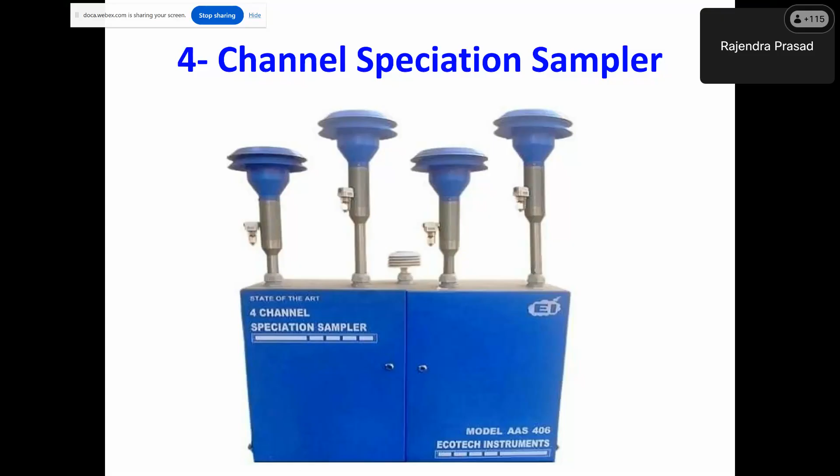Basically put to the x-ray, we can find out all the heavy metals, anions, cations. So if we know this fingerprinting of the sample, then we can correlate who has contributed in that area. If the concentration of, say, potassium is very high, we can say that yes, biomass burning took place somewhere. These equipments are used for source apportionment studies at a number of IITs and research organizations.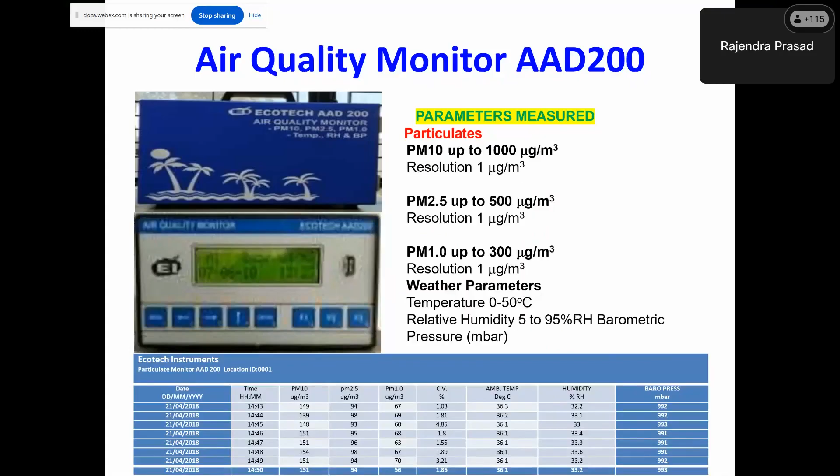Then the direct reading equipment was also developed, based on the laser-based sensor for PM10, PM2.5. And now we also have an advanced equipment where we can do 10, 12 parameters together: PM10, PM2.5, PM1, SO2, NO2, ozone, CO, CO2, oxygen, then formaldehyde, and total VOC. And that is battery operated. So these were something on the instruments.

Now for the control, we have left, I think, 5-6 minutes, so I will give you some glimpse of it.

So we have to select the presentation. I'll take 1 minute only to select. Forgot to take that. Is it visible, sir? Yes, sir. Okay, well.

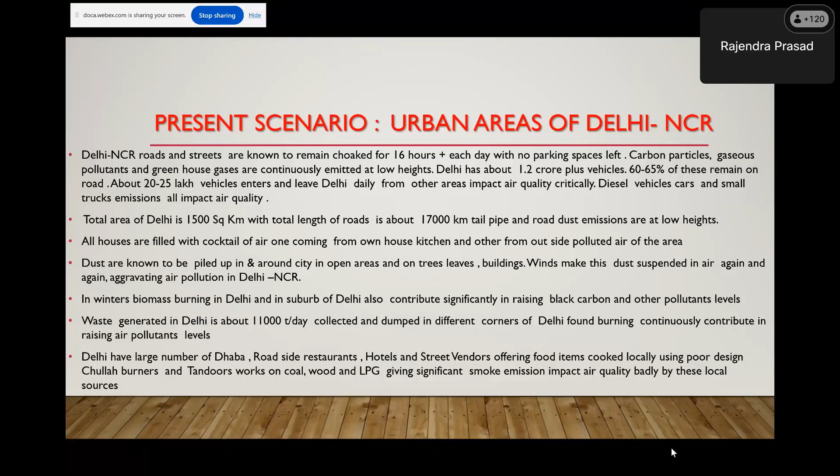Now, what needs to be done? Some points we are highlighting. Delhi and NCR have a network of roads. Each road must have pleasure plantation along the road and also on the dividers. Beautiful flowering plants and wider lush green leafy plants should be planted to increase the aesthetic look and also to control air pollutant levels. Plants must act as a barrier between the footpath and the road. Road-wise contract may be possible.

Easy solution for quick plantation and for their upkeep. Some example photos I can show you. You see what I want to say. You go to any airport, Delhi airport, Bangalore, Hyderabad, anywhere. Very good plantation you can see, you can feel. Why can't that kind of plantation be done in the city? Of course, it requires a lot of money, a lot of effort.

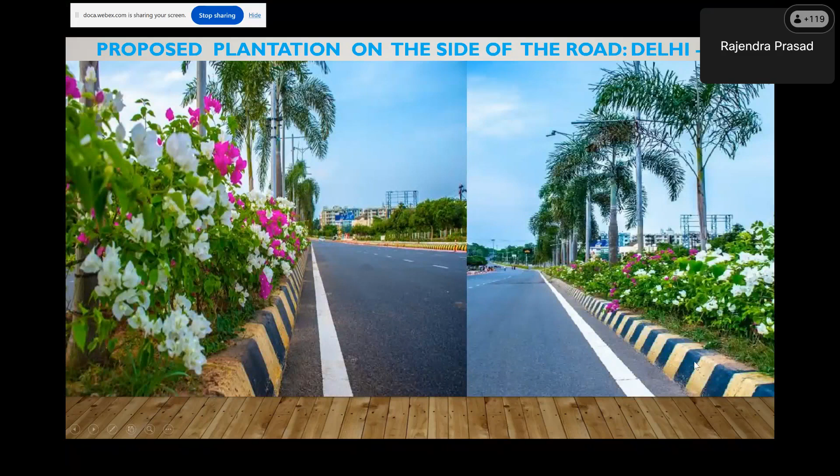They should be given to private contractors. They should maintain these roads and the plantation. I want to show you this plantation. You see, this is the side of the road. What kind of plantation? This entire road is showing very good plantation. This is close to an airport only. I took the photo from there, and you see these are on the footpath.

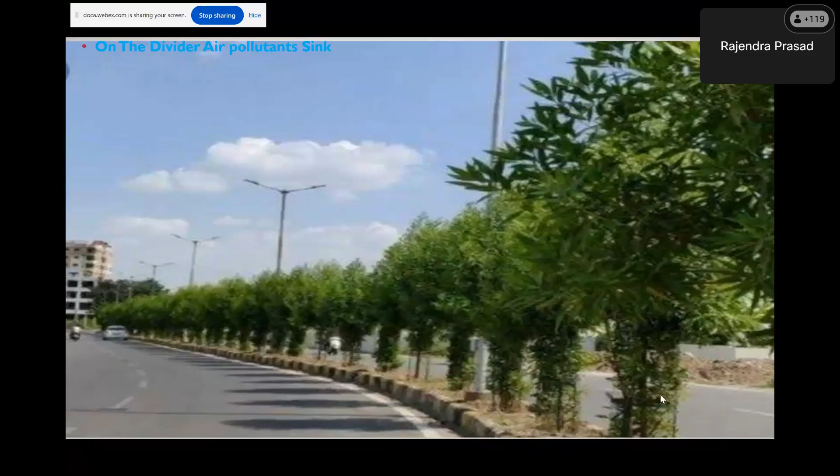This plantation. If you are increasing the plantation and maintaining the road clean, the contribution of these roads to the rising dust level will reduce. Do you see that between two roads? If this kind of plantation can be done, one can reduce the dust levels and other pollutants in that area. Let us go back to that.

And this road must be vacuumed, because the dust lying on the road keeps on lifting with the movement of vehicles. More vehicles, more speed, more dust will be lifted up. So we have to reduce that by cleaning the road. Wet washing is very much required once in a week or so.

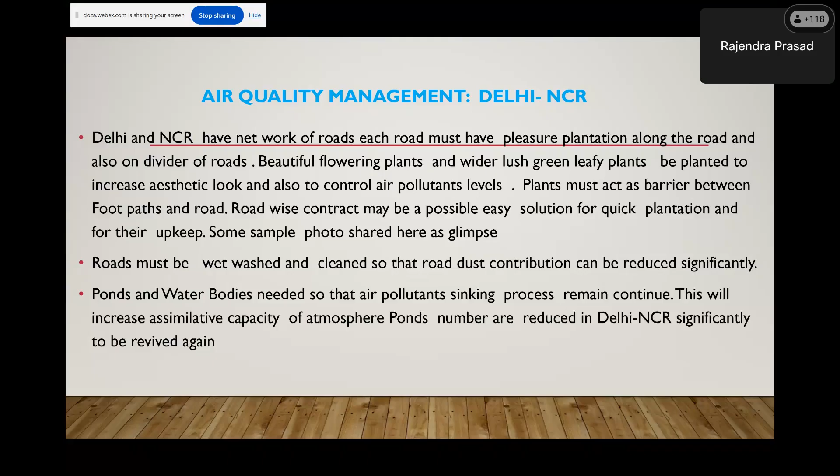Ponds and water bodies need to be made. They act as a sink. So in the city, they should be made. All the chaurahas should have fountains, so that this water can really act as a sink of the pollutants, and then the atmosphere can be improved. This I've already shown.

Overloaded vehicles must not be plied on the roads, so that emissions are not increased. In the city, no vehicle should be overloaded. Diesel vehicles must have a diesel particulate filter, and cities should not allow any vehicle coming from outside without diesel particulate filters. I think a lot of dust can be trapped.

Public vehicles, trucks, tempos, buses, auto rickshaws must stop only at defined places, so they can reduce congestion. They are stopping anywhere. The bus halts somewhere, taking passengers, and creates a lot of problems. Material shifting for construction sites must be done from 10 p.m. to 5 a.m. This construction activity is contributing significantly to raising dust levels in the urban area.

At construction sites, waste segregation and management must be done at RWA level, resident level, to reduce generation. Garbage and waste collection bins must be provided at all needed places, so that polythene bags and other waste are not dumped on roads and streets. Biomass burning must not be allowed in cities. Security guards and others in winter should be provided electrical heating.

Restaurants and dhabas must use electric tandoors and electric heating tops for cooking. Use of coal should be banned. Street vendors of chaat and other food items must use LPG. DG set operations in winter should be done on CNG or LNG or other gaseous fuel.

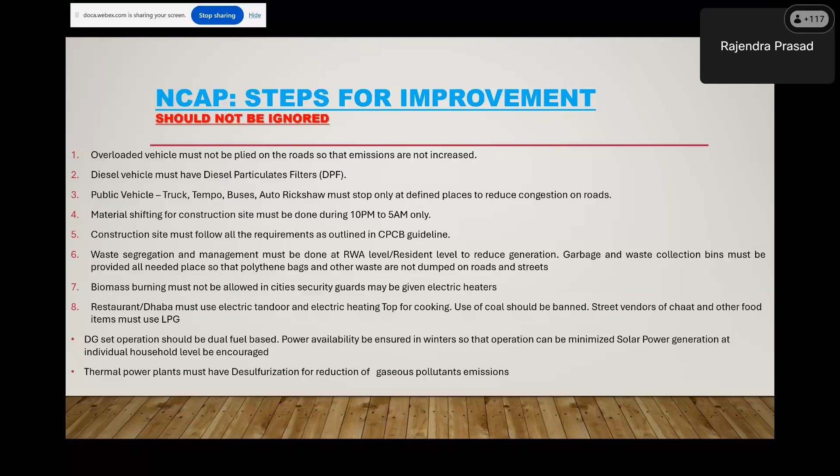Thermal power plants must have a desulfurization unit, so that these gaseous pollutant emissions do not take place. Investment is needed on management and control rather than on regular monitoring. More monitoring is not required if the levels are very high. I am a monitoring company, but I very confidently say this is the time where we have to really contribute towards control. We do monitoring only to know whether it is reduced significantly, or how much reduction took place.

Further strengthening the monitoring network in areas where machines or stations are already there is not required. You can add some background locations to really see how we are better and how we are bad. Real-time source apportionment measurement may be necessary for a city like Delhi. One station they have already set up.

So online they are getting a source apportionment study. Online they are getting which values are increasing and which source is contributing. That you will be able to do. DPCC has put one station online where all these parameters are monitored, then the model is predicting, and ultimately one can take action.

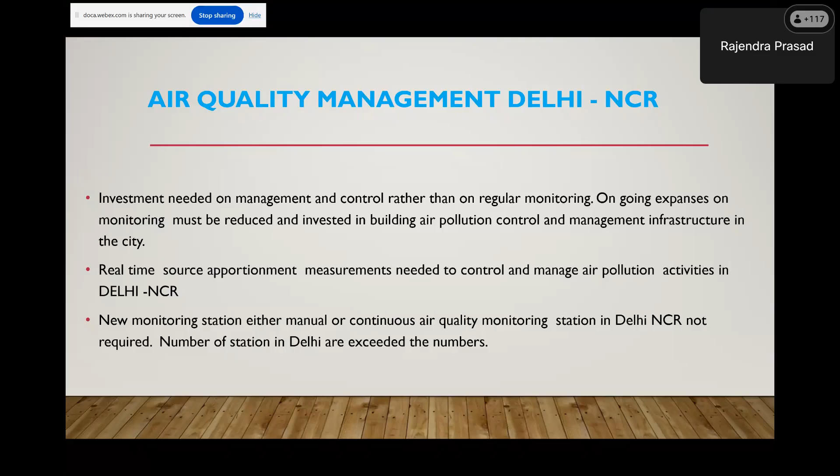The NCR should have uniform enforcement because it's a big area. I think we should not discuss NCT since it's very small, only 1500 square kilometers, while NCR covers 55,000 square kilometers. Air pollution is found increasing due to people migration in Delhi NCR.

Since resources are limited, migration has to be discouraged. For that, the administration has to look into it. Public participation is mandatory, and public transport needs to be improved. Last mile connectivity needs to be exercised, and waste composting needs to be done at the RWA level. Plants must be planted in and around houses and colonies to increase aesthetic look and for air pollution control.

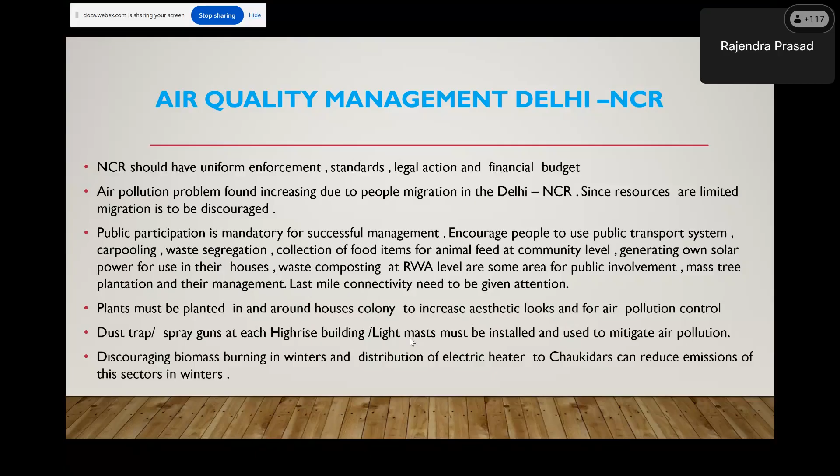Dust trap spray guns should be installed at each high-rise building. Light masts must be installed and used to mitigate air pollution. Discouraging biomass burning in winter, I've already highlighted. Congestion has to be reduced.

Public works related offices should be shifted; we should not allow more offices or more things to come into the city. New setups should not be permitted in Delhi NCR. Same thing applies for other urban areas. Shift the winter capital - these are all for Delhi only. Discourage migration of people into NCR by asking for a one-time migration fee or something like that.

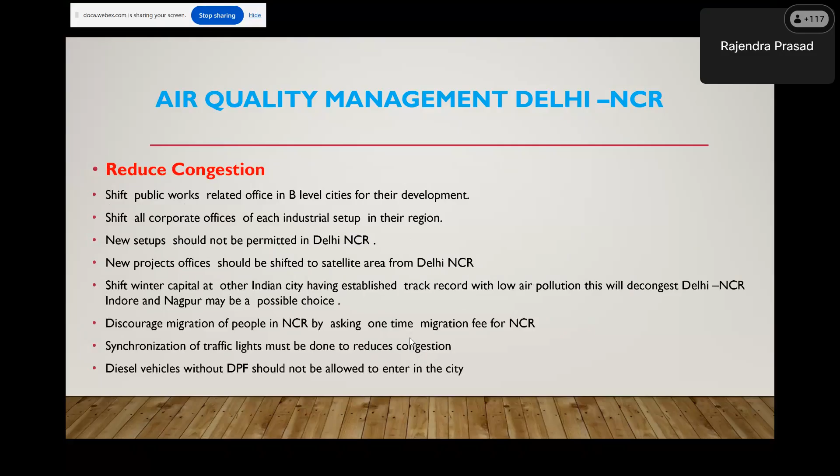Synchronization of traffic lights is very important to reduce congestion. Diesel vehicles should have particulate filters. Incentives to industries for adopting cleaner production should be promoted.

We should look to and be inspired by examples of national or international cities that fought air pollution and achieved better air quality. Many cities, even Shanghai in China and other areas, were very polluted at some point, but now they are not. What they have done, we should also copy, adopt, and take lessons from.

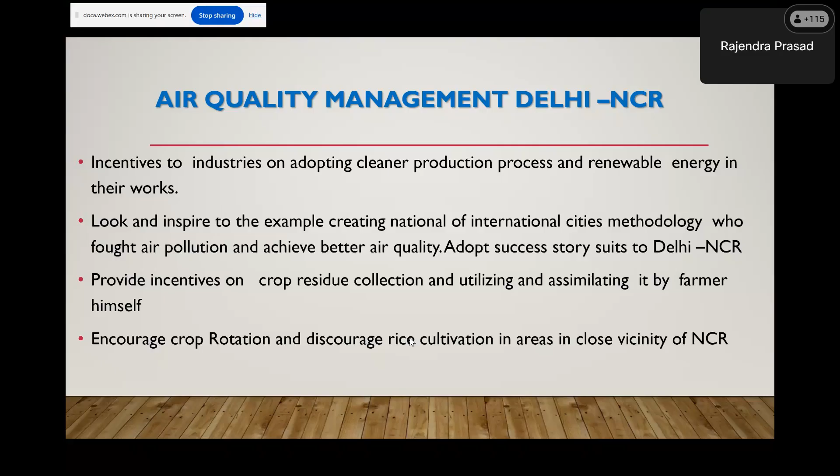Encourage crop rotation and discourage rice cultivation in areas close to NCR. This will basically impact and reduce urban pollution. Electrical vehicles should be used so vehicle emissions are reduced. Fuel oil rates need to be increased, and the additional money should be put toward plantation and other things. Monitoring needs to be reduced, as I already said.

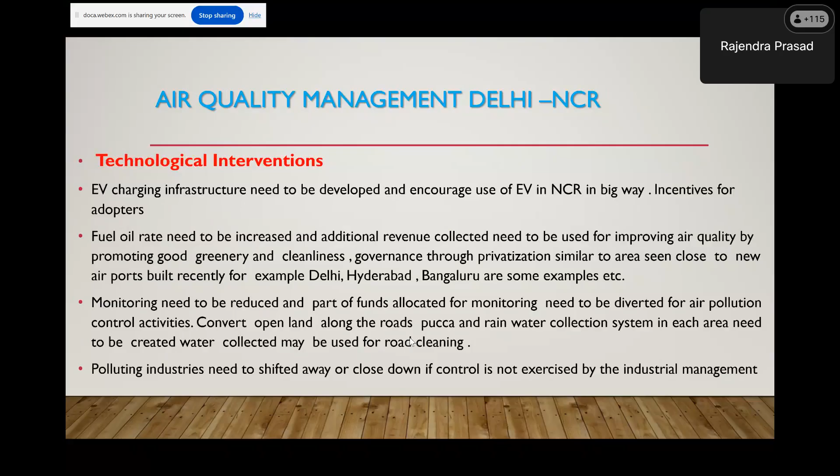Polluting industries need to be shifted if they are located in the city. So these are all the points I thought I would be able to share, and now I will stop sharing, and then we can discuss if there are any points or questions.